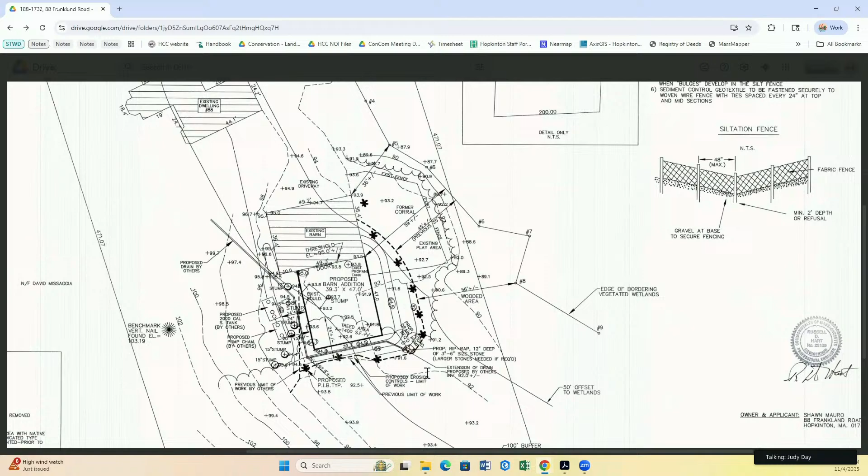Through the chair, yes, this is the approved plan up here. So there were PIBs specified around the full barn, but boulders were, I guess, approved as the PIB option. So I think it's maybe more of a funky situation that we have both, but they were approved, and boulders are something that we often recommend using.

Okay. All right, it sounds like everything's been satisfied for this COC. So can I get a motion to approve the COC with signatures by Anna or Judy?

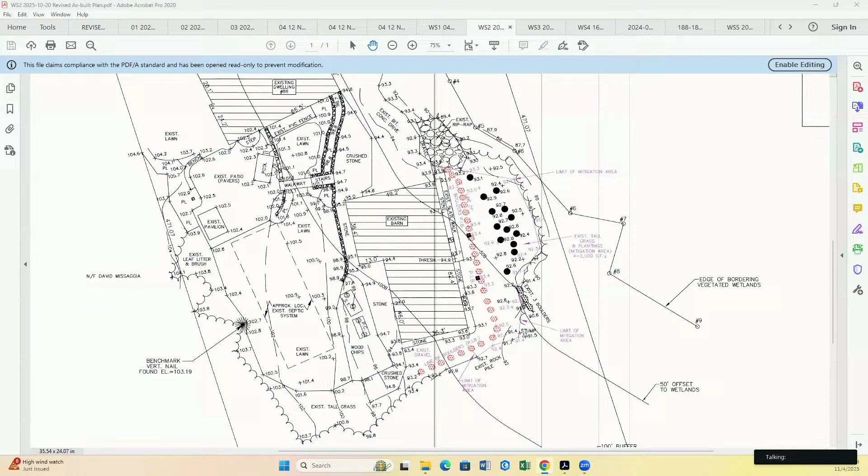This is Ed, so moved. Can I get a second? I'm not muted, I'm happy to second. All right, all in favor - Ed, aye. Ted, aye. Matt, aye. Jim, aye. And I am also an aye. We're all set there. Thank you. Yep.

All right, being that it is 7:15, I'll jump up to the beginning of the agenda and the new hearings.

This one is a request for determination of applicability. Ed, do you have the sheet to read off? You betcha, thanks, coming at you.

The Hopkinton Conservation Commission will hold a public hearing on Tuesday, November 4th, 2025 at 7 p.m. virtually online to hear all persons interested in a request for determination of applicability filed by the Hopkinton Water and Sewer Department to install a replacement public drinking water well. Location 0 Fruit Street, Assessor's Map U3, Block 2, Lot 1.

All right, thank you. You're welcome. Do we have someone representing the DPW here tonight? I am, I'm Laura Callahan from Callahan Consulting. Welcome. I'm a hydrogeologist representing Hopkinton DPW and the Water Department. Okay, great, thank you.

Do you have a presentation you want to give here? I can quickly go over it. The town is proposing to replace Fruit Street well number 1 because it's old and it's lost its capacity. It's proposing, in addition to a replacement well, to install 15 feet of water main to connect the new well to the main station facility.

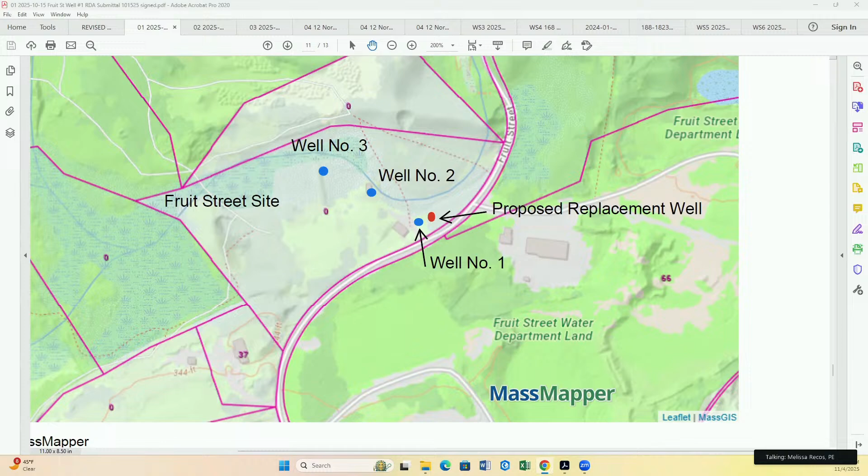All right. Thank you. Thank you very much. It was nice to meet you all. You too. Great.

Next up, we have Hopkinton Trails Committee. This is a continuation of the Chamberlain Street Loop Road Trail connection and stream crossing. All right, Judy, you want to give an update?

Sure, through the chair. So we haven't discussed this project in quite a while. The applicant's been working on a stormwater report and checklist for DEP, as that was one of their requirements prior to issuing a DEP file number. So we do have a stormwater report, stormwater checklist, discussion on how the project is meeting stormwater standards to the extent practicable. It's quite long, so I haven't sent it over to Joe for his review yet.

I just wanted to make sure the commission, whether or not you wanted a peer review for the stormwater report, as it'd probably be a pretty sizable chunk of time to spend on it. And DEP, I believe, has the report, but has not issued a file number yet. So I think we have Chuck on the line if folks have questions about it. And if the commission can discuss whether or not they'd like peer review on this, that would be helpful. Okay. Oh, and we also have updated site plans showing the soil stockpiling area. That was a request at the last discussion. Okay. Thank you.

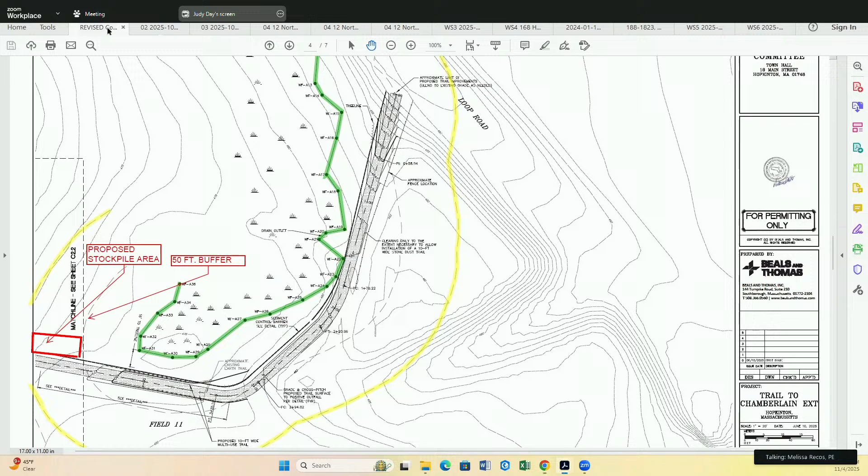Can I get a motion to continue this to the 25th? I'll make that motion. Second. All in favor? Ted, aye. Matt, aye. Jim, aye. And I'm also an aye. All right, thank you, Mr. Dauchi. Thank you. Okay, good night. Good night.

All right, next up we have 75 South Street, notice of intent continuation on the boring remediation work.

Judy, can you give us an update? Sure, through the chair. So this is, again, a notice of intent to conduct borings, soil remediation, and install monitoring wells within a parking lot at 75 South Street related to a past hazardous material release. At the last meeting, there were just a few outstanding comments that we've received responses to from the applicant.

So they have addressed the question of whether the work qualifies as a limited project. It appears that it does, but since there's no work within the wetland resources, that doesn't really necessarily change the outcome of any decisions made. Since they aren't proposing any alteration, there isn't an expectation for replication.

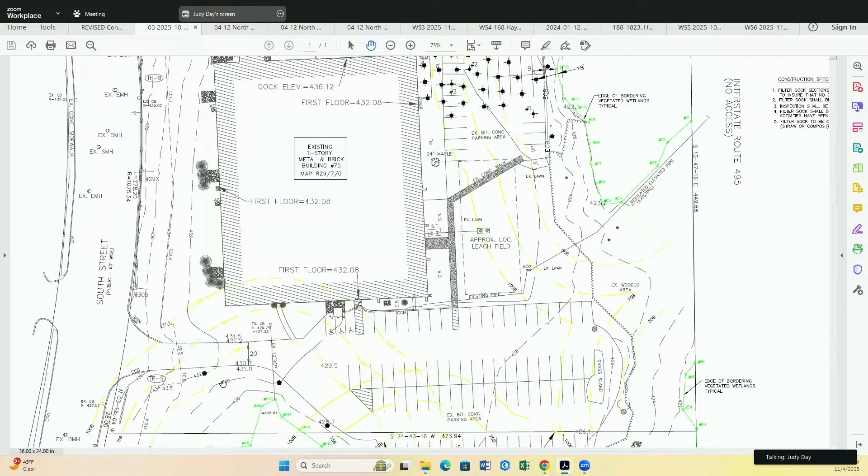Additionally, the applicant has added PIBs along the main BBW where most of the work is going to be. Initially, they were just down in the south side of the property, but they've added additional PIBs along this parking lot here.

We can confirm that the applicant has paid the additional town portion of the state filing fee that the commission determined was needed to cover each of the monitoring wells being installed. We do have a DEP number, and they didn't have any substantive comments.

And I believe the outstanding items to discuss are if the commission is happy with the placement of the PIBs, and I believe it was discussed at the last meeting, but the applicant is not proposing formal invasive species management as part of this scope of work. I believe Joe had comments that were largely addressed, but if he has anything additional, I would turn it over to him. Okay.

Joe Marquedant, do you have anything to add? Really nothing to add, I think Judy covered everything pretty well. My only remaining comments were that the Conservation Commission confirmed the receipt of the additional fees, which was just confirmed, and as mentioned, whether any invasive species management needs to be discussed. Everything else has been adequately addressed.

Okay, so is that three PIB markers that were added? Is that right? Three. Okay. Yep. Those look fine to me, I think.

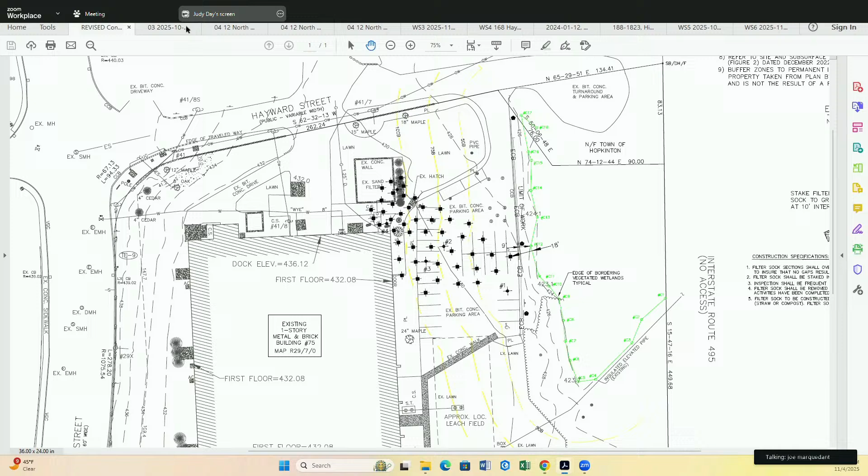Can I get a motion to approve this application with signatures by Judy and Anna? I'm not going to wait for Ed to make that motion on approval, so I'll go ahead and do it. I'll second. All right, all in favor? Ed? Well, all this abuse, I think I'll go last. Okay, Ted? I'll approve. Ted is also an aye. Matt? Aye. Jim? Aye. And I am also an aye. All right, these guys are all set. Great, well, thank you.

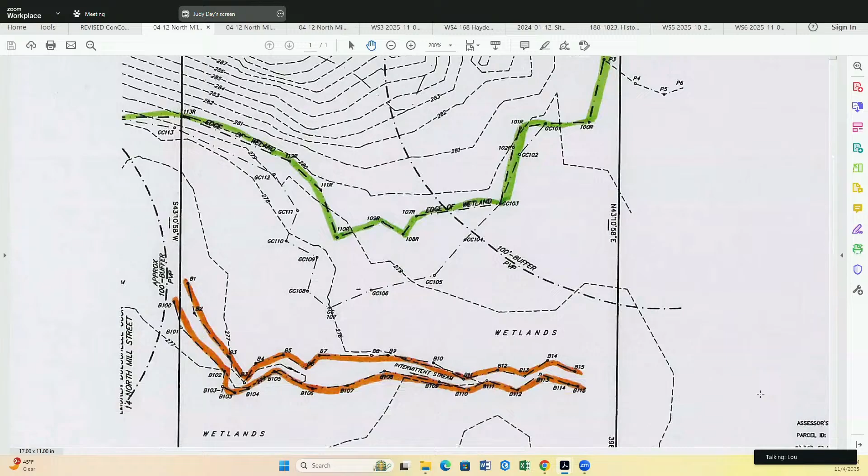And so the vernal pool habitat is 125 feet. It's not a buffer. It's the actual—what the bylaw categorizes as potential vernal pool habitat is from the vernal pool flags, 125 feet out. So on the ANRAD, it has a 125-foot PVP boundary line. It's not called a buffer. That's what we're looking for. I'm happy to put it on the plan. I think obviously if we're going to proceed along this alternative of trying not to cross the wetlands to do any work, that becomes a moot point, really. At that point, we don't care whether you make it 100 feet or 200 feet. So for this particular plan we're looking at, it doesn't impact the area that's being proposed, but just if we could get the line to match the ANRAD for consistency, that'd be great.

Anything else, Judy? Yeah, Matt had asked when there were still multiple alternatives for a breakdown of buffer zone and resource area impacts. So Matt, if you still want a table for the alternative selected on exactly what the proposed resource and buffer impacts are. I think we're down to one plan at this point, so it's a bit of a moot point. My request was more when we were considering or evaluating multiple alternatives. So if this is the proposed plan, we're good.

And then last, there's a suite of comments from Joe and DEP that haven't been formally responded to, so it's commonplace to get a response for both the consultant and DEP comments. Well, I think Joe mentioned that most of those comments applied to the original plan that was filed, not any of the alternatives—he hadn't reviewed any of the alternatives at that point. So I'm happy to take a look at those comments, but I think for the most part, if this alternative is the one we're going to proceed with, those comments wouldn't necessarily apply to this plan. But I'll take a look at those, and if there's an answer required, we'll certainly provide it.

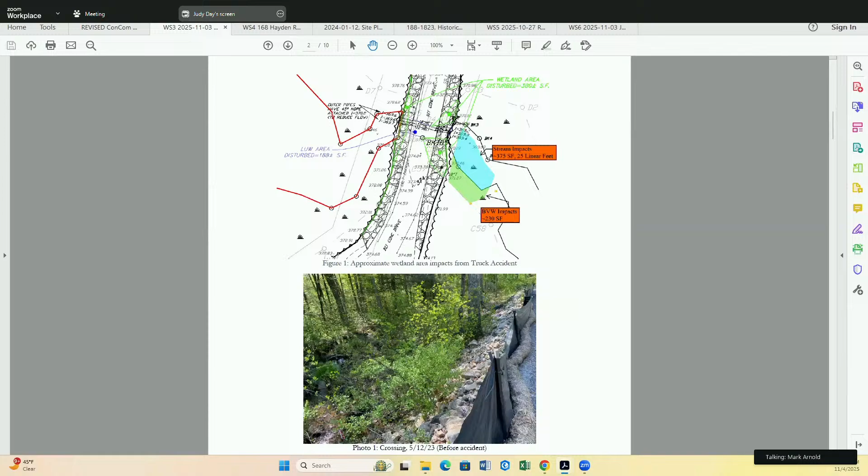You can see figure 1 is a sketch that we provided, just giving an approximation of what happened. This is actually the as-built of the crossing that was built. This is the common driveway, not the Whisper Way subdivision roadway. It's the common driveway for two lots. We had crossed this location where there was an old crossing, widened it out slightly, added control pipes to maintain the vernal pool elevation, which has been working well.

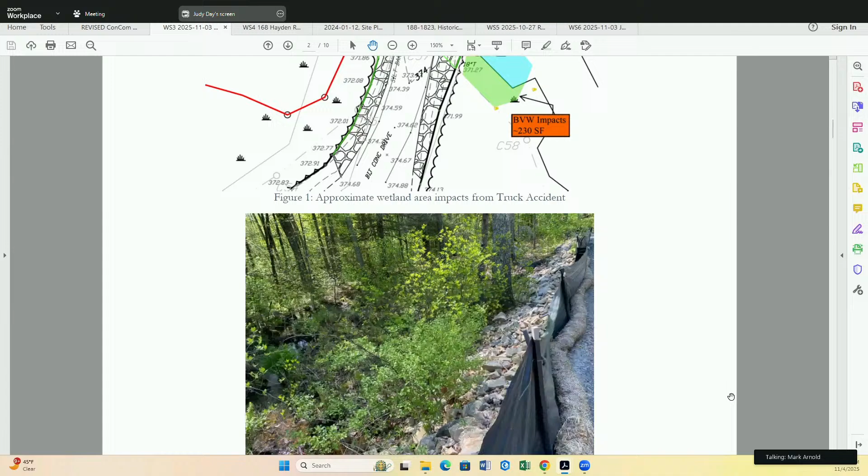So the first photograph is from 2023, just to show you what it looked like originally. We had pretty thick vegetation along the toe of the riprap slope, a lot of sweet pepperbush and stuff like that. A lot of that vegetation along the edge of the riprap was actually just pushed over by the dump truck because it fell, and the side of the dump truck fell on the vegetation.

So when the truck came up, that vegetation kind of popped back up, and you'll see that in the photographs. The area that was really damaged was just beyond that, which in this photograph you can see is a little less thick. You can see it actually gets less thickened vegetation, more open. The stream was very braided in that location, more hummocky, with some exposed rocks, etc.

So as you walk through these photos, Judy's going to just flip through now. You can see this is the accident as it had occurred. There's the truck that came over. We did have some damage to the bark of that red maple that was hit. Structurally, the tree looks okay. Didn't have any issues from the windstorm the last few days, which is great. So we're hoping the tree can recover there.

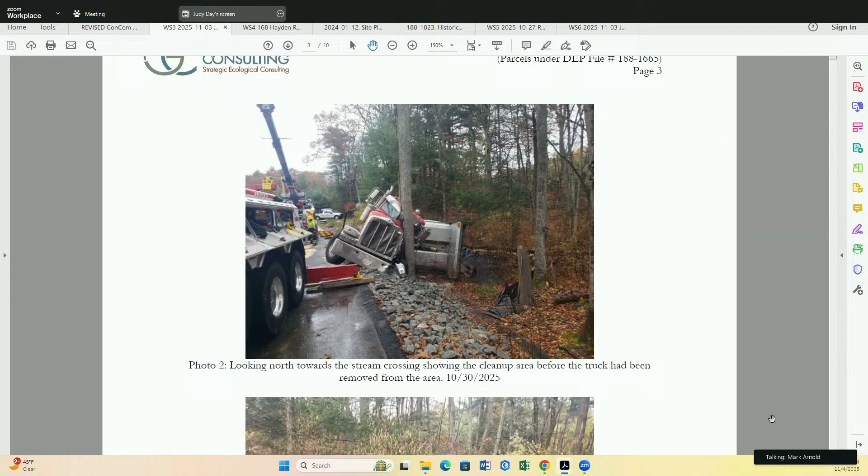Otherwise, everything else that was damaged was basically some shrubs and herbaceous plants. So as you go down these photographs, you'll see this is kind of the erosion controls. There's the asphalt millings. Most of it has been removed in this photograph, but you can still see the extent of where they had been spread over to. Most of the vegetation in this area was sweet pepperbush, high bush blueberry, and just herbaceous plants.

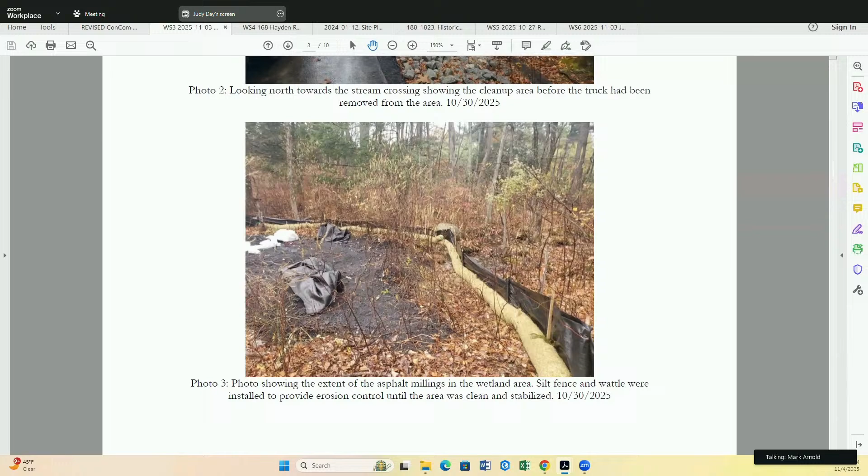Just keep going, Judy, if you want to slowly go through the next set here. So just another shot of the millings. You can see here in this photograph how there's still a vegetated strip between the riprap and the impact, because the truck had fallen over that and protected that strip area, which is good to at least provide some protection along the edge as things restore from what we've done.

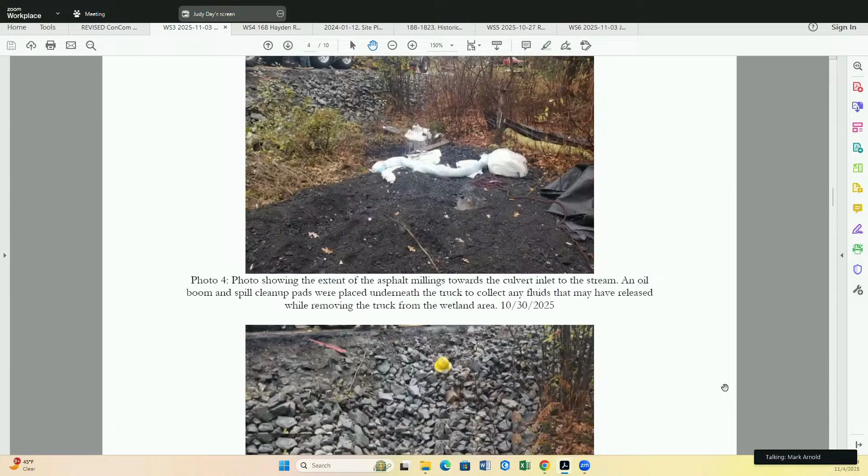And then just keep going down. So another picture here, you can see the culverts coming out of the crossing there. And then the next set of photographs should show after the millings are removed.

So there was some soil removed as part of the removal of the millings, because we needed to make sure we got the millings all out. We didn't want to leave them impressed into the soil at all. So we worked hard, and there was a little bit of topsoil removed. We tried to preserve as much as we could, but a little bit was scraped out because of ensuring we got the millings out rather than leaving them in. This wasn't like sand or gravel that could be left a little bit on the surface without impacting the soils. So we did have to take it out. But overall, pretty minimal impacts otherwise.

Again, a lot of hand shoveling work here by the crews and ourselves. Another picture here, photo 7, just showing where the stream comes out into that area. And then you'll see the next set of photographs are going to show what we did afterwards.

So this is now showing, you're starting to see some green in this photograph. And so those are, we planted 2 willows. Well, let me pull up what we actually put in there. So we found a pocket of wet vegetation that was coming up inside the subdivision, outside the buffer zone, just from activities over the years. And we were able to transplant 2 willows, 3 high bush blueberry, 2 white pine, 5 sensitive fern, 2 royal fern, some goldenrod, hop sedge, and rushes into this area.

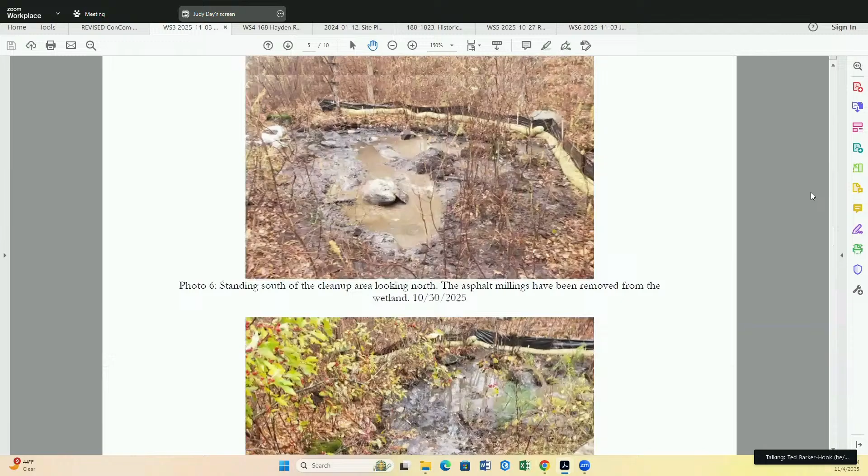Does anyone on the commission have any questions? Hi, Melissa. I just have a quick question, but I think Mark answered it right at the end in his summative statement, if I may. Yes, sure. Mark, it was a little unclear to me what crossing this was, whether it was the one that we approved a couple of years ago.

But it sounds like when you said you're going to be there looking at the back crossing, this is on what I might refer to as the driveway that had been there a long time. Is that where this crossing is? The one that kind of runs parallel to 135? This is the crossing that was behind 129 Wood Street, the old house that was taken down. This is the crossing near 495.

Okay. If I can share my screen, I actually have an aerial shot. That would be helpful to me. So let me see. And here we go. Perfect. Here we go. All right.

So this is the crossing that was. So here's the aerial. Here's 495 here. I'm going northbound. Here's Wood Street. Here's that driveway that came up to the house. The house was right in here. Okay, the driveway's been narrowed up here. We've got reforestation area in here. This is that crossing, that common driveway, so it's nice and narrow. And the incident happened right here where my cursor's showing. Okay, that's where it occurred.

And the hearings we had a few years ago are further south along that road. Correct. Right, okay. The hearings you had are south, down this direction about 1,000 feet. Okay, alright, I just wanted some clarity on where it was. And that's the site that we don't have a certificate of compliance yet. So we are monitoring the replication area, which is over in this area right here, and the crossing. So hopefully we'll be getting as-built together, and then closing that out in the springtime. Thank you, that was my only question, trying to figure out where it was. Great question. Oh, thank you.

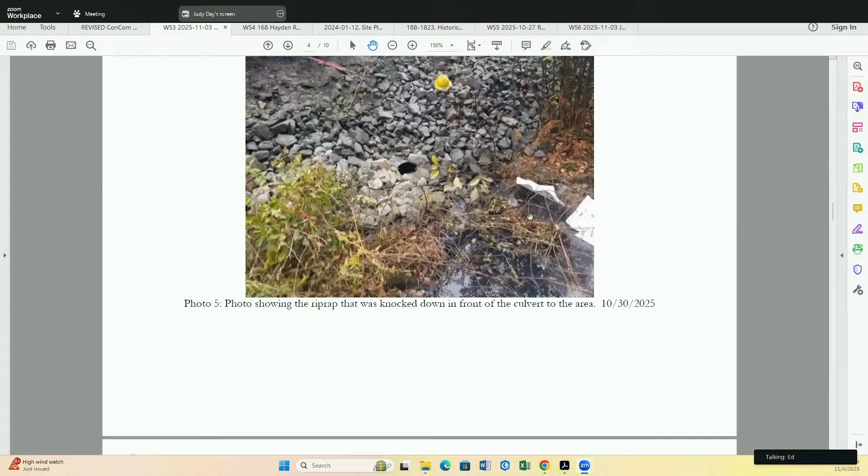You'll have to go down until the page comes up and I say stop. Right there, stop, up a little, right there. See the helmet? Did you get the guy out, or is he lost?

Climate change. That's all for me.

Yeah, nobody was hurt, thankfully. I had my steel-toed muck boots on, Ed.

Good. Okay. Well, thank you. I think we're all set. Yeah, just keep us posted.

And just a note to the commission, we did submit some supplemental information for the certificate of compliance for the whole subdivision to staff today. They're reviewing that, and it should be in your files shortly if it isn't already. We look forward to having that discussion at the November 25th hearing.

Okay, and just to note, we are in person on the 25th. That sounds great. I like in-person meetings. Okay, good. All right, thank you. Have a good night, we'll see you then.

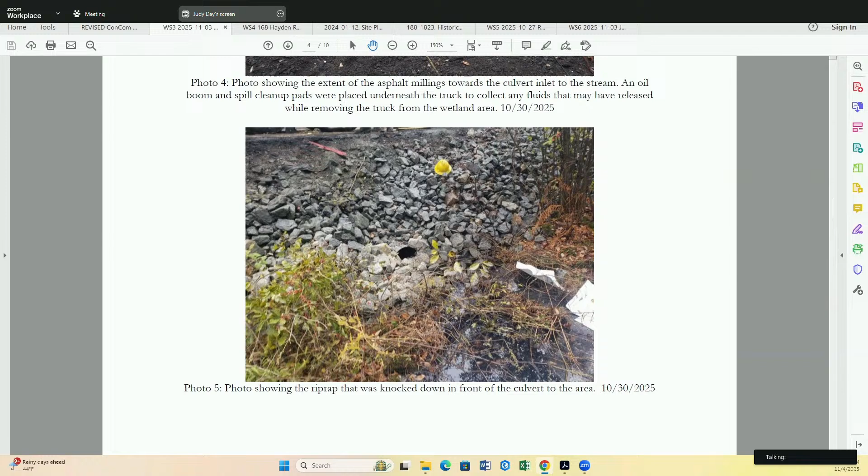All right, next up we have Hopkinton Historical Society. This was the request for certificate of compliance. We talked about this in the last meeting, and Judy was nice enough to go out and do a review for this project. So Judy, you want to go through what you found?

Sure, through the chair. For my first COC review, if anyone has feedback, let me know. I put together a memo in the public folder covering the work approved and reported deviations from the applicant, which included the area disturbed between the building and the brush line at the northwest building corner being a little bit wider than approved.

They reported that the rear sump pump is being discharged by a separate pipe to the stone splash pad, and the left front quadrant of roof runoff couldn't be connected as approved, so it's being redirected to the splash pad at the back of the property, straight back.

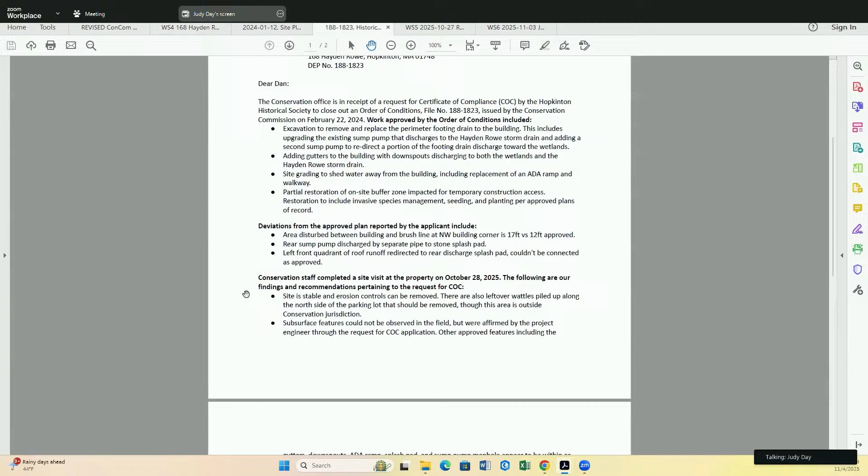Also noted from our site visit, the site is stable, but the erosion controls are still out there, so those should all be removed. There's also leftover wattle stockpile. It's outside of jurisdiction, but probably best to have that removed.

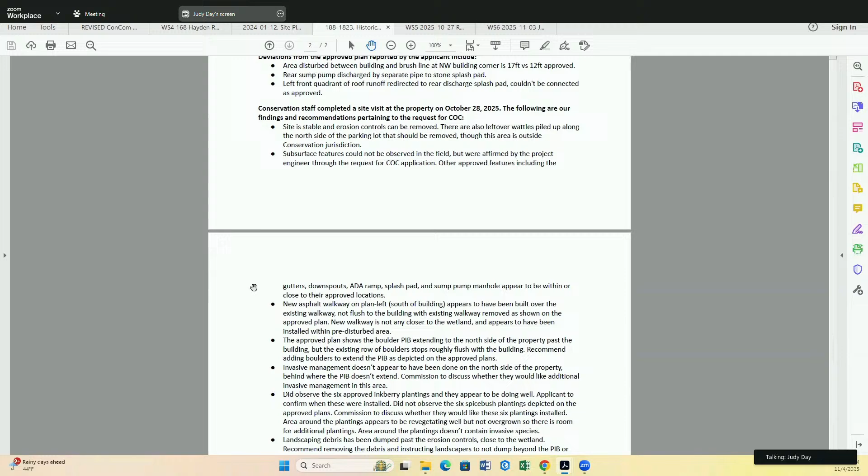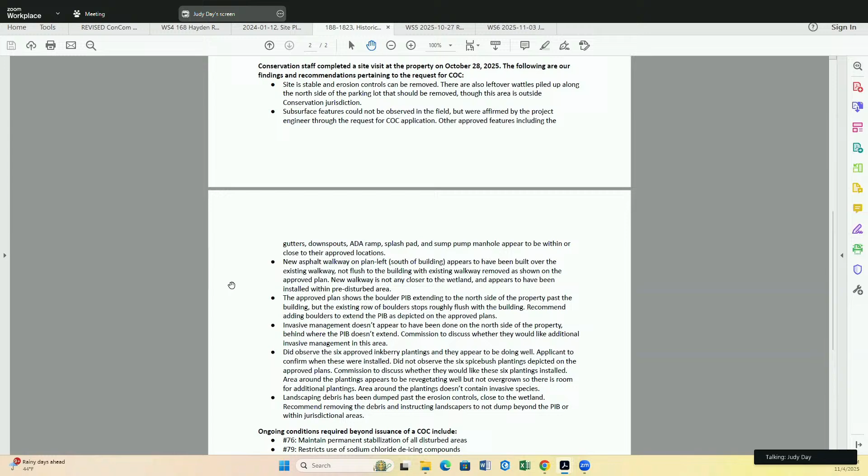We obviously couldn't observe the foundation drain and subsurface features, but these were affirmed by the engineer through the COC request. We did observe the surface, visible features, in relatively their approved locations, except for a few minor discrepancies.

So the new asphalt walkway south of the building - this walkway was approved to be flush with the building. There was an existing walkway that was supposed to be removed and converted to lawn. Looks like the new walkway was just paved over the existing one, so no new disturbance. It's not any closer to the wetlands, just in a slightly different location.

The approved plan shows the boulder PIB extending all the way to the north side of the property, but the existing PIB stops roughly flush with the building. This area was also intended to be treated for invasives and restored, but it remains tangled with invasives, so it was not treated as approved. That's something for you all to discuss if you'd like to see the PIB extended and the invasives dealt with.

We observed there were 12 approved plantings, 6 inkberry and 6 spicebush. We saw the 6 inkberry and those seem to be doing well, but we did not observe any spicebush, so that's a discussion point on whether you'd like those installed after the fact. In general, the restoration area around those plantings looks like it's vegetating well, with no invasives grown back up in that immediate area.

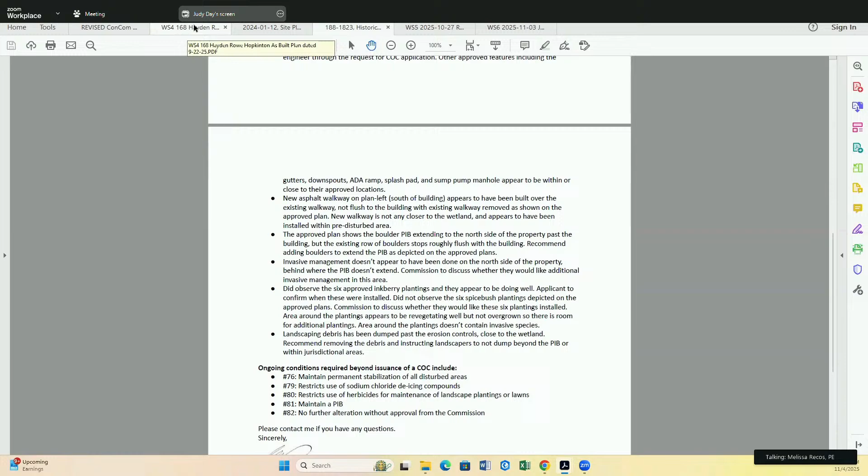All right, do we have, was this Marco, Dan, was this your project? This is McIntyre, Dan McIntyre. Are you here, Dan? Good evening. Hey.

I think Judy explained it quite well. I wanted to ask if you had any feedback on that north corner, the PIB limit and the invasive management over there. Is there any backstory on why it ended up where it is as opposed to the approved plan?

Yeah, I think the contractor just needed more room as they excavated around that foundation for the footing drain. The equipment couldn't fit in there, so it ended up larger than we originally anticipated. But the invasives, we prepared an invasive control plan as part of the NOI, and that's going to be taken over by the society members or their landscaper. That corner right there, we weren't going to do any invasives because that's actually in the wetland, whereas the other invasives we took care of were more into the buffer part of the wetland.

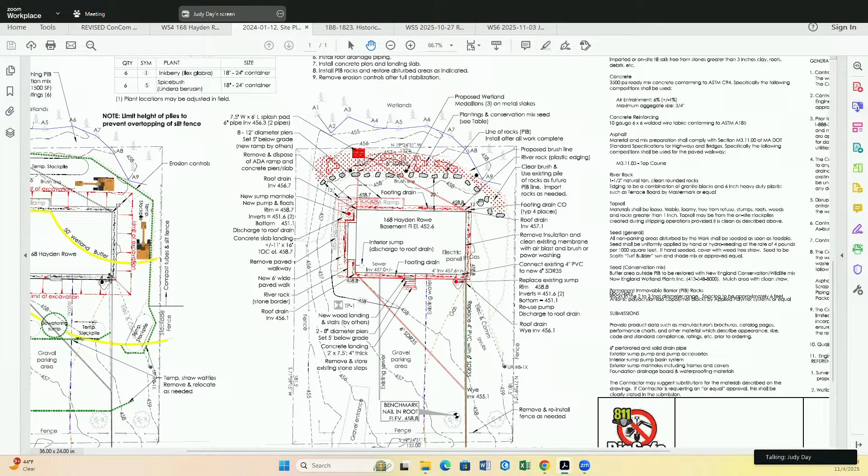I see, this is the approved plan. I just pulled it up to show where the boulder's meant to wrap around, sort of flush with the end of the building here. On the as-built, they just end here instead of coming down around. So it's this area we were talking about, in front of the wetland line. They would like to maintain that as is, just in case they have to get around the building again, because the other side is blocked up by the ADA ramp and the walkway to the handicap parking space.

The reason that asphalt walk gets shifted a little bit is because the previous ADA ramp, which we had to take out to excavate around the foundation, we were going to put back to the same dimension, but we found out it was not ADA compliant. So we had to make that ramp a little longer, which pushed the asphalt walk out further from the building. So there's really no longer access around that corner of the building, they had to get back behind the building. Okay.

Can you bring up that picture again, Judy, that shows where that brush line is? So the question is whether the rock PIB line or medallions should extend further along where the erosion controls are. That's the question, or that's what's missing. We could certainly bring in more rocks, they ran out of rocks to do this, but at this point we'd probably do more damage bringing in the rocks than it's worth.

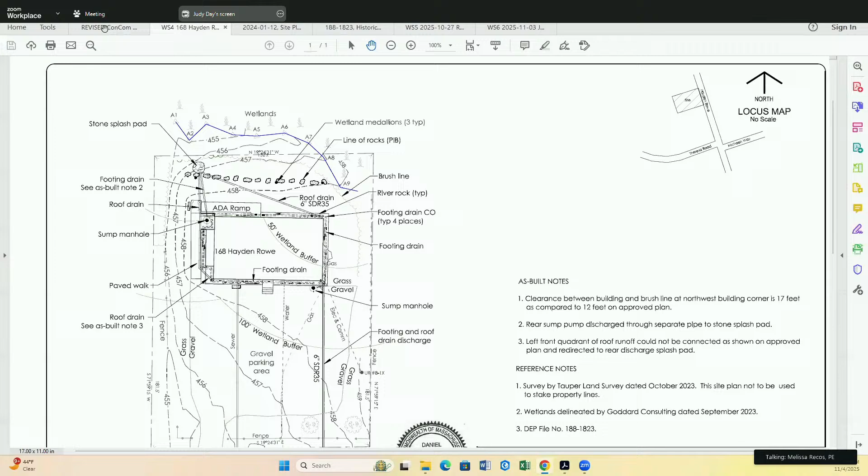All right, next up we have 10 Exchange Street, returning from a violation discussion. Judy, I guess do you want to kick this one off? Sure, through the chair, I can give a quick overview. We've also got Dave Marquardon and the property owner on the line too.

When we last talked about this enforcement issue, the commission had asked for a wetland delineation to be confirmed by Joe. So we had the original delineation that showed BBW on the south side of the property, a ditch that runs through the BBW, riverfront and bank flags across the street past Exchange Street. Originally there was one isolated vegetated wetland behind the existing garage. When Joe went out to meet the applicant's wetland scientist, they found an additional IVW just north of the garage, between the garage and the driveway.

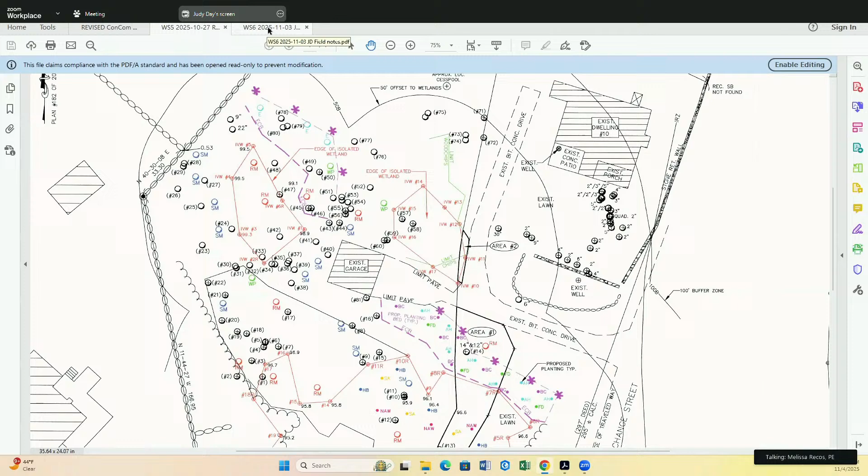All right, next up we have 32 Granite Street. This is another violation discussion. I see we do have the homeowners on the line. Welcome. Judy, do you want to go over what we're looking at here?

Sure, through the chair. So the last time we talked about this violation, we had mentioned that we saw several stumps within jurisdictional areas cut from the street level, but we couldn't get onto the property to see exactly how many there were. So we've been working with the homeowners. They provided a sketch depicting their review of the stumps on the property - these circles show the stumps they identified. They also allowed Anna and I to come onto the property to verify their sketch, and we found quite a few additional. We split them up by area, but in total we counted 71 stumps.

Within jurisdictional areas, at least according to this old delineation we have on file. Of the 71, they ranged from about 1 inch diameter to, I think the largest we saw was around 6 inches. So I think the commission needs to decide next steps, similar to Exchange Street - you all had asked for a new delineation, stump survey, and a restoration plan. Any variation of that, or if you have questions on anything we observed, let me know.

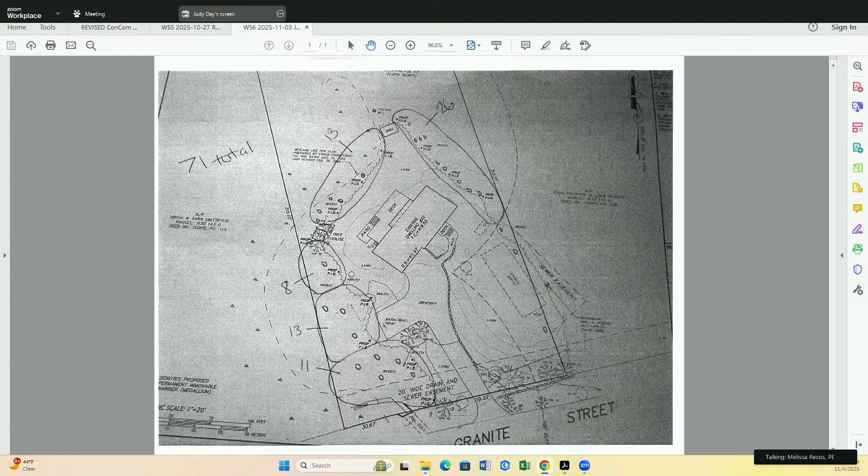Yeah, I see Ted's here. But I'll let Judy go ahead and give a rundown on this one first. We're just pulling up some pictures. All right.

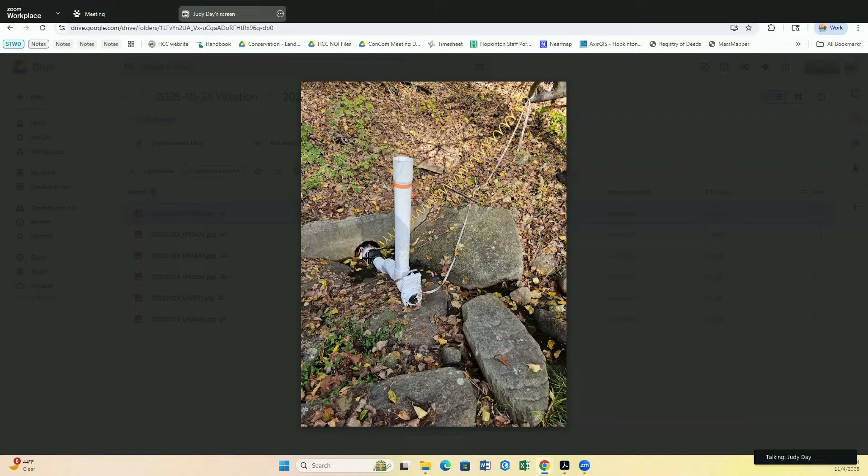So this is a plug in the lower basin where that stream immediately comes off of. It was open at the time, or not fully closed, so water was coming through here. This is the larger basin at the top of Blueberry, sort of in between that lower basin and the development, about as full as we've ever seen it, and pretty filthy. But at the time, they were not pumping it out or releasing any water from this basin. So this was a couple days before the 26th. Other couple angles.

I think there's questions about how Toll is planning to manage the volume that's been in this basin, given that it was significant rainfall, but nothing groundbreaking, and what the thresholds are for when they start pumping or releasing water. Long-term plans to stabilize the site still -- we're still having issues with dirty runoff getting into this basin. So we just wanted to have Ted in to talk about some of the issues they're still dealing with.